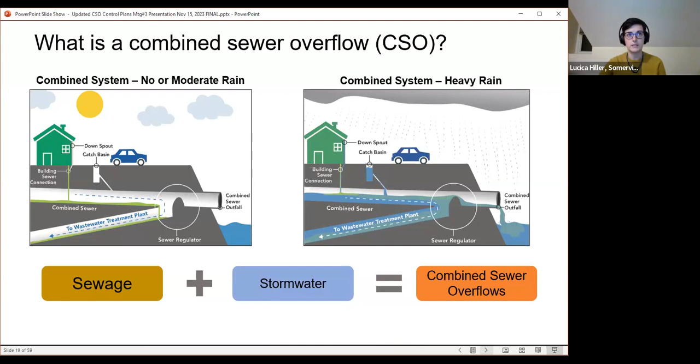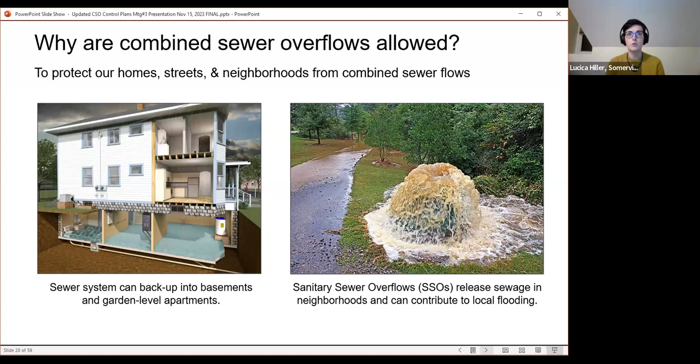If this release was not allowed, for example, by closing the sewer regulator that you see in this image in the circle, next slide, please, Erica, that combined sewer flow will find a place to go. And that place is our basements, and that is called a sewer backup, like in the rendering on our left, or our streets. And when that happens, it is called a sanitary sewer overflow, as you can see in the picture on the right. Sewer backups and sanitary sewer overflows are a more immediate threat to public health than CSOs.

If you've been following combined sewer overflows, you probably noticed that the number of CSOs change from year to year, and the volumes of these spills also change every time it rains. Why is that? The main reason is that no two rainstorms are the same. And based on years of data we have collected, we know that CSOs are influenced by how hard it is raining, how long does it rain, and where does the rain fall. For example, a heavy rain event in one side of the city may cause a CSO, but if it falls in a slightly different location, it may not.

This table here is meant to highlight some of that. Just looking at the last 2 years, 2021 and 2022, you see that 2021 was what we call a wet year. The total rain during that year was higher than the average in our region, which is 44 inches, while 2022 was a dry year. Additionally, in 2021, we experienced more heavy rainstorms that lasted longer than we have experienced in 2022. As expected, the total CSO volumes, both treated and untreated, into the Charles, the Mystic, and the Alewife Brook, are significantly different, from almost 238 million gallons in 2021 to less than 4 million gallons in 2022.

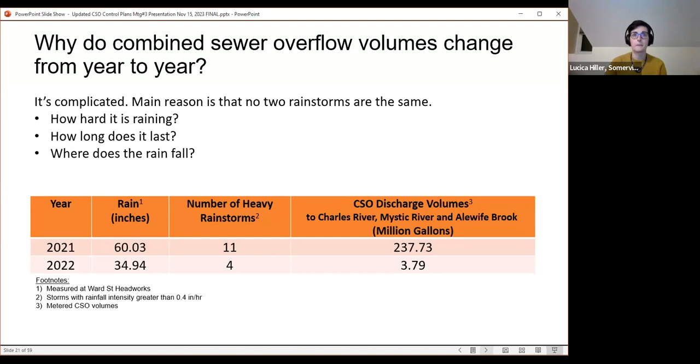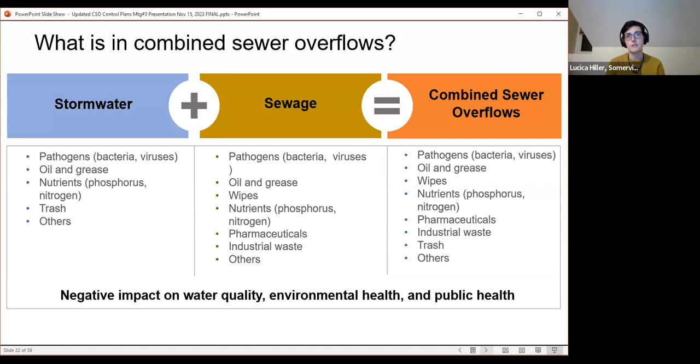Remember when I said that combined sewer overflows are a combination of stormwater and sewage, both of which carry a number of pollutants. Pathogens like bacteria and viruses are found in both stormwater and sewage, and they can make us sick if swallowed. Nutrients like phosphorus, again, found in both, are vital for agriculture and our perfect lawns. They harm the fish in the rivers. Wipes and trash hurt our environment. These stormwater and sewage pollutants have a negative impact on the water quality of our rivers, the health of the ecosystem and environment, and last but not least, our health.

Because of the negative impacts to our health, please avoid contact with the water for 48 hours during and after heavy rains. To get notified as soon as a CSO spills and to find out where that CSO happened, you can sign up at these 3 links included here and also posted in the chat. For MWRA CSOs, you can sign up at bit.ly/MWRAreports. For Cambridge's CSOs, you can sign up at www.cambridgema.gov/subscribe. And for Somerville CSOs, you can sign up at www.somervillema.gov/CSO. Other CSO communities in the region, like Chelsea and Boston, have similar notification websites.

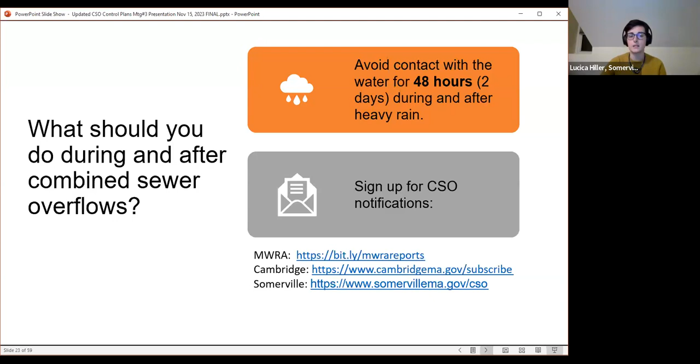Now I'm going to pass it over to Catherine Woodbury from Cambridge, as she will talk to you about the work we've been doing for the past couple of years. Thank you, Lucica. Hi, my name is Catherine Woodbury, and I am a Senior Project Manager at the Cambridge Department of Public Works, and I am working as the program manager for Cambridge for this project. So you heard a lot about CSOs. So what are we doing to help reduce CSOs?

CSOs are located along the banks of the Alewife Brook, the Mystic River, and the Charles River. These CSOs are connected by MWRA facilities such as large collector pipes, pump stations, storage, and/or treatment facilities. Each entity has been implementing projects to reduce CSOs over many decades, and we have significantly reduced the amount of CSOs that were occurring in the Alewife Brook, Mystic River, and Charles River since the beginning of the initial MWRA long-term control plan in 1998. We are now working to further reduce CSOs through our current efforts to create 3 separate updated CSO control plans.

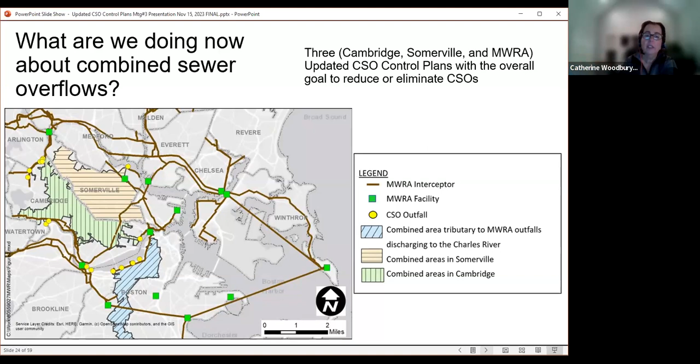The timeline to develop updated combined sewer overflow plans is a multi-year project that will take us through the year 2026. Tonight is our 3rd combined public meeting to discuss the tools that we can use to create alternative projects to reduce or eliminate CSOs. Our goal during these meetings is to check in with you, the public and stakeholders, to solicit feedback as we take incremental steps in the development of our draft updated CSO control plans. The United States Environmental Protection Agency and the Massachusetts Department of Environmental Protection have reviewed and approved this schedule so that we can accommodate the public outreach needed for this process, and as we work to also engage and reach out to the environmental justice populations impacted by this planning effort.

I want to add that in addition to these large joint public meetings, we are also individually attending neighborhood and community events to reach residents in their neighborhoods and engage environmental justice populations and communities. There is a lot of work and analysis to do before we will be ready to begin screening alternatives and developing our draft updated CSO control plans. Currently, these plans are not due until the spring of the year 2026. Additional combined public meetings will be scheduled to discuss program elements as we get further along and before decisions are made. Next slide, please.

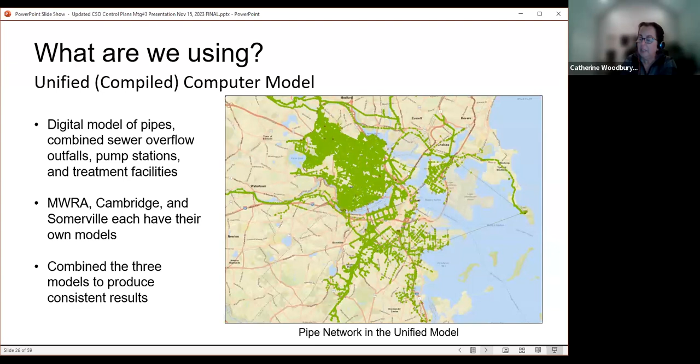The green in this map shows the level of detail that we have in our combined model. Since we are each developing separate plans for our own CSOs, and these CSOs are interconnected, the unified model will produce consistent results that will show system-wide impacts. Next slide, please.

We have identified a future year of rainfall to be used in combination with our unified model, and that year is referred to as the 2050 typical year. Next, please.

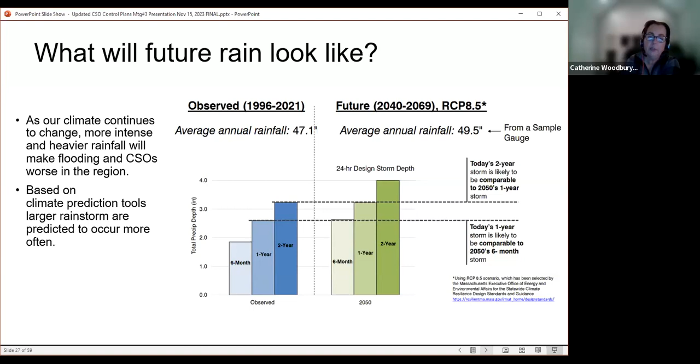So in CSO planning, the typical year has two main purposes. One, to evaluate and compare potential CSO reduction projects, and two, to assess progress once projects are implemented. A full year of rain data that best represents rain over time is a way of explaining what the typical year is. It also is a representative average year for planning as rain changes from year to year.

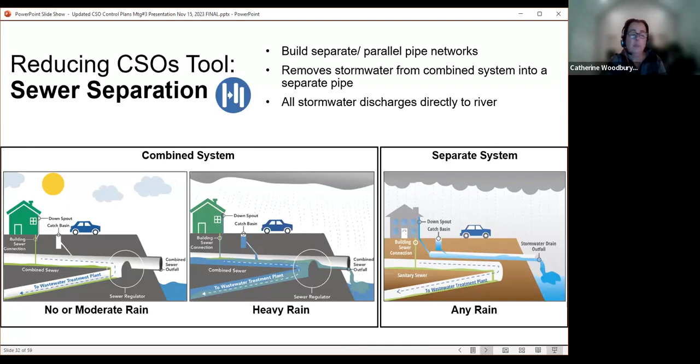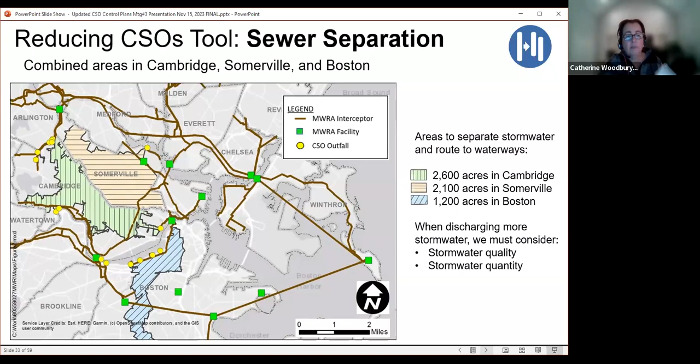Sewer separation is an effective tool to reduce CSOs since it removes the majority of the stormwater from the sewer pipes and sends it directly to the rivers. Sewer separation often requires significant construction in streets, providing us with an opportunity to replace older pipes with new pipes. This work can also cause disruption to other existing utilities such as gas lines, water, telecommunication, and smaller pipes, which may require relocation, allowing us to upgrade these utilities as part of the project.

Once separated, stormwater will go directly to local rivers in every storm event. As we said earlier, stormwater also carries pollutants, which can degrade water quality. Adding more stormwater to the local rivers must not worsen flooding or overall water quality. Therefore, sewer separation must also require additional tools to treat stormwater and manage flood impacts within our rivers and communities.

Sewer separation often involves street-by-street construction and can often require multiple phases of work on the same street to sequence the relocation and upgrade of different utilities, each contributing to noise, traffic, and parking impacts along streets and in neighborhoods.

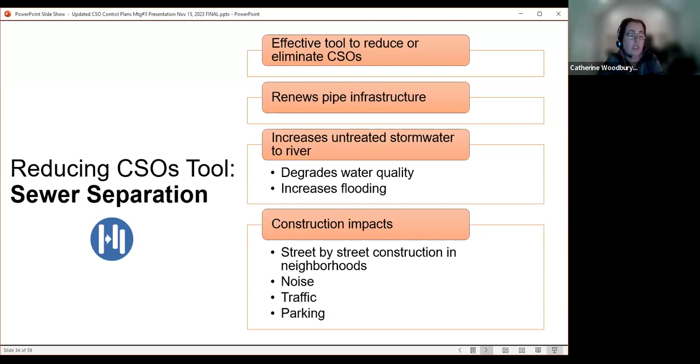I'll now turn this over to Lucica to discuss another CSO reduction tool, green stormwater infrastructure. Thank you. The next tool is a very beloved tool. Thank you. I want to acknowledge the emails we have been receiving from the Charles River Watershed Association folks. It's my favorite tool too.

The system collects some of the stormwater runoff before entering the pipe system. And they can also treat the stormwater to reduce some of the pollutants. In our area, one of the pollutants of concern is phosphorus. Next slide, Erica.

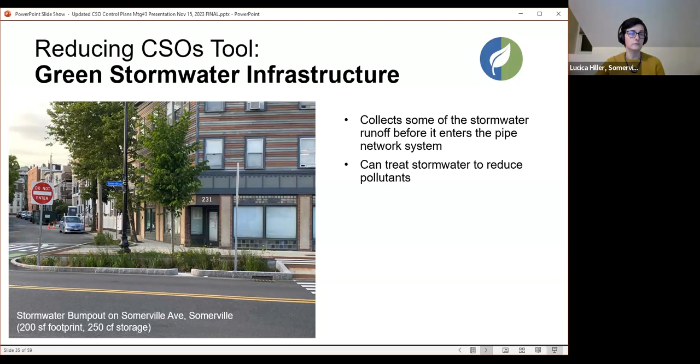Our work so far, looking at ways to reduce flooding and now ways to reduce CSOs, is finding that green stormwater infrastructure has limited CSO reduction benefits. And that is mostly because the systems we can install in our communities tend to be small, and they can only capture the beginning of a storm and are full by the time the heavy rain starts. And if you remember, heavy rains are when CSOs happen.

Green infrastructure, if above ground and if it includes plants and trees, can add green space to our communities, and the trees can help reduce the urban heat island effect. It can recharge our groundwater and improve our stormwater quality. But the challenges we face range from finding the space to install them, when we're also considering other uses and needs for our streets and sidewalks and parks and open spaces. So, we have to think of bike lanes, parking, mature trees and their roots, bus routes and stops.

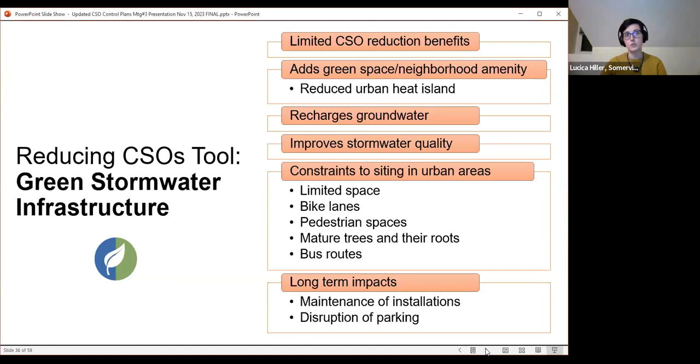In the long term, the system needs specialized monthly maintenance. Overall, we consider green stormwater infrastructure a net benefit to our communities, and we are looking to install them whenever possible. Now I will hand it over to Jeremy, who will talk to you about a few more CSO reduction tools.

Thank you, Lucica. Good evening, everybody. My name is Jeremy Hall. I am a program manager at the MWRA. I've been managing the MWRA's combined sewer overflow post-construction monitoring program for the past 6 years. Tonight, I'll give you a brief overview of some additional tools to help reduce CSOs.

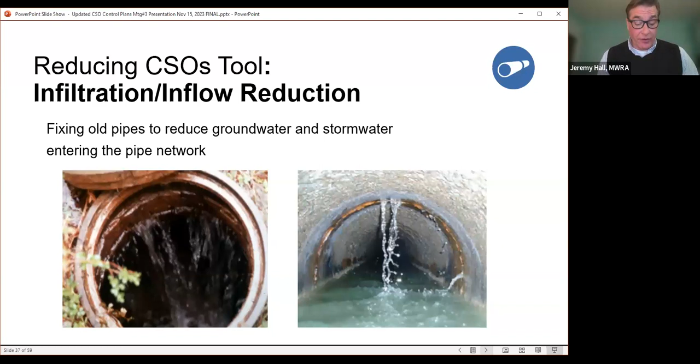So on this slide, we're discussing inflow and infiltration. The top left shows inflow, which is surface water runoff that enters a sewer system. Inflow could come from gaps in manhole covers, broken pipes, illegal connections, such as roof leaders, cellar drains, yard drains, or catch basins. In the picture on the right, we see infiltration, which occurs when groundwater enters the sewer system. Infiltration can be caused by cracks, holes, tree roots, or bad connections. Under these conditions, groundwater can enter the sewer and increase the volume in the sanitary sewer system. Next page.

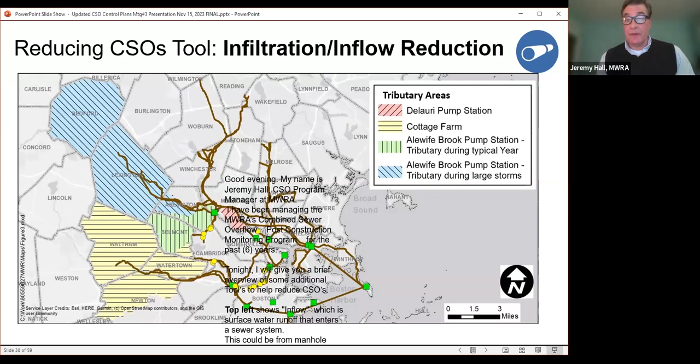So generally speaking, I/I projects have a limited CSO reduction benefit. I/I programs are great at renewing the pipe infrastructure, so that's a really good thing. I/I reduction projects do come with the following impacts. They do tend to cause local street-by-street construction issues, noise during construction, traffic during construction, and temporary parking bans to allow for construction activities. Next slide, please.

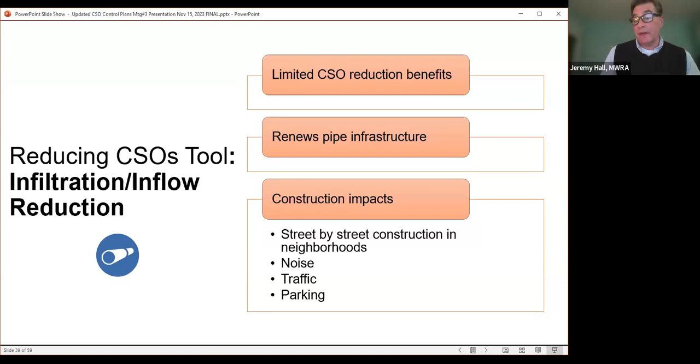Using storage as a CSO reduction tool can be effective. The benefit of this tool comes from the ability to hold combined sewage during a large storm event until the sanitary system has capacity to convey the stormwater or the stored water and bring it to the treatment plant. By the way, storage can also be accomplished by installing large underground pipes to hold and release the stored water. Next slide.

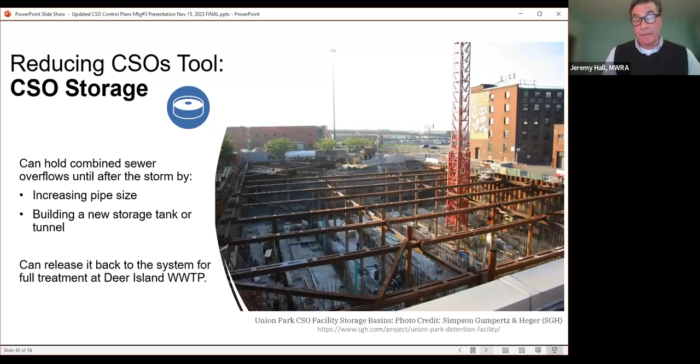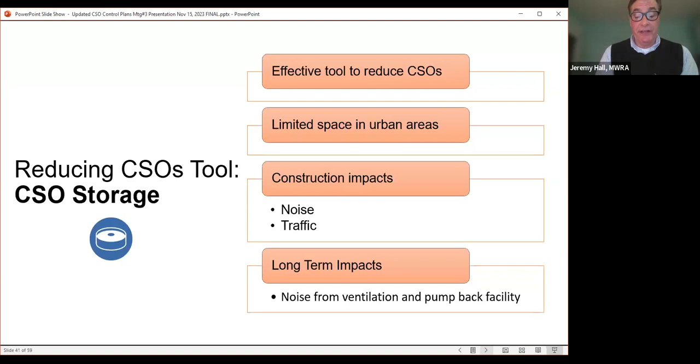So storage of combined sewage is an effective tool to reduce CSOs. As shown on the previous slide, storage requires a lot of space. Construction of a storage facility is a large undertaking that will generate noise and truck traffic for months and months. Once the facilities are completed, noise can be heard from the ventilation systems in the pump back facilities when they are in operation. Next slide, please.

So on this slide, we're going to be discussing a topic that's a little bit more aggressive in terms of what it can do, and that is what we refer to as conveyance. Conveyance is increasing the size of existing pipes and facilities, and this is an effective tool in reducing CSOs.

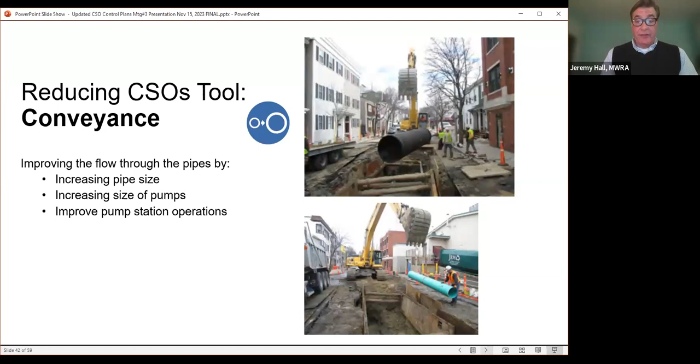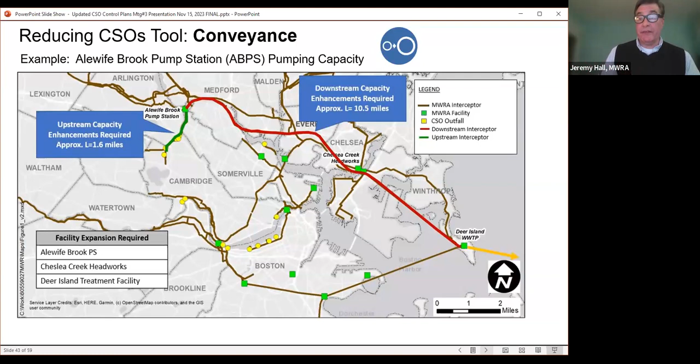And before any of the green or the red are replaced, we would have to do major work at Chelsea Creek Headworks and Deer Island Treatment Plant. We're talking huge projects. And so while no doubt this would help reduce CSOs, it would also be the most expensive option discussed tonight. Next page, please.

So to recap, increasing the size of the pipes and facilities would be an effective tool to reduce CSOs. It would renew the service life of the interceptors involved, the headworks, and the facility known as Deer Island Treatment Plant. The downside is that it is a very, very large undertaking that would take many years to plan and construct.

Realistically speaking, it would be incredibly difficult to locate the space needed in these urban areas to install these extremely large interceptor pipes and to acquire the land that the facility upgrades require to get the benefits that we would see from increasing our conveyance. If this tool were to be selected, we're talking about years of construction impacts, noise, and tremendous expense. Next slide, please.

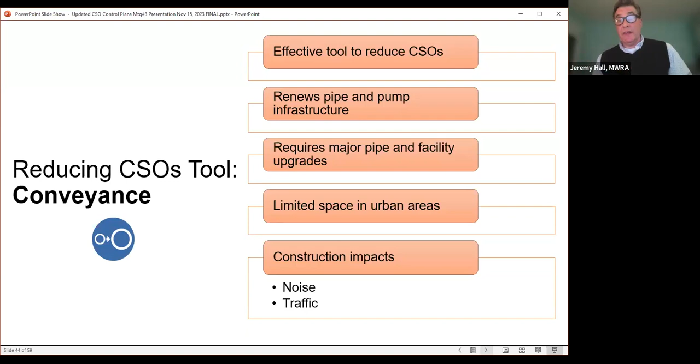So we talked about sewer separation, green stormwater infrastructure, inflow and infiltration reduction, storage, and conveyance. While these are all tools to help reduce volume, we now are going to talk briefly about treatment. So if you go to the next slide.

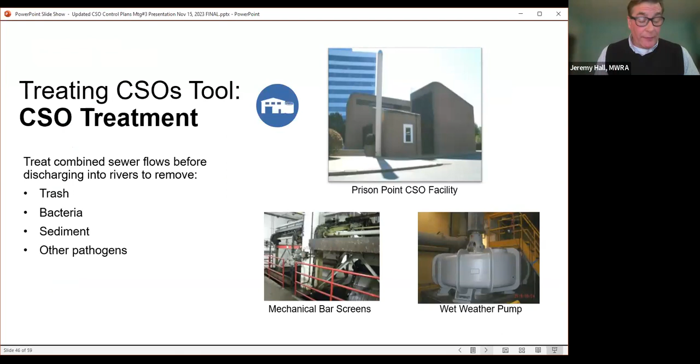So treatment is an effective tool to protect the water body. However, CSO treatment facilities need to be located close to existing CSO outfalls and receiving waters. CSO treatment facilities are large industrial buildings. So some things to consider are the noise during construction, as well as the continuous need to replenish the chemical supply, requiring large trucks to access the facility after it is operational.

So I hope we gave you some insight on the types of tools that we would be evaluating. Thank you.

I think Luchika, you were just going to say a final thing or two, and then we'll pause for questions. Yeah, so I see in the Q&A a lot of people have suggestions already, which is great. Thank you. And this kind of relates to that, right? We have all these great tools. Oh, Erica, you can share the presentation again, please.

So we have all these great tools, right? And now the work begins. These tools are the building blocks that we will use to develop CSO control alternatives for this plan. At the end of the planning work in 2026, CSO control alternatives will be projects that we can build to further reduce or eliminate combined sewer overflows.

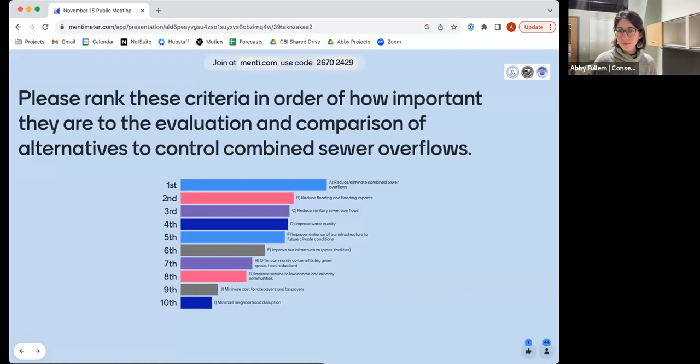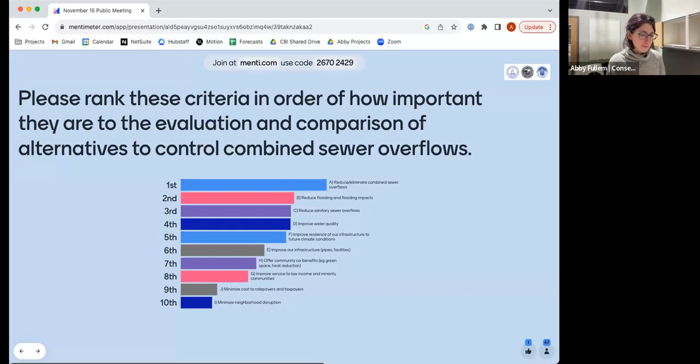All right. Looks like it's kind of settling. Oh, spoke too soon. Take another 20 seconds. All right. Thank you for doing that. Let's go to the next question.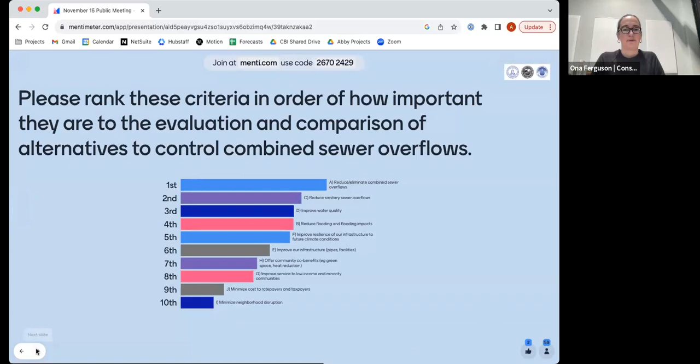Please share any comments you have about specific criteria. So those 10 things we just listed, if you have a thought about one of them or a few of them, if you can be explicit, that's really helpful.

And you can see the responses starting to go up. Any comments on these specific criteria? Just to remind you, the last two open-ended questions are going to be about sharing any other criteria we should consider and just kind of anything else. So if you have something that's not about this, you can hold it for a minute and we'll have a space for that. Thanks, Abby, for scrolling. That's nice.